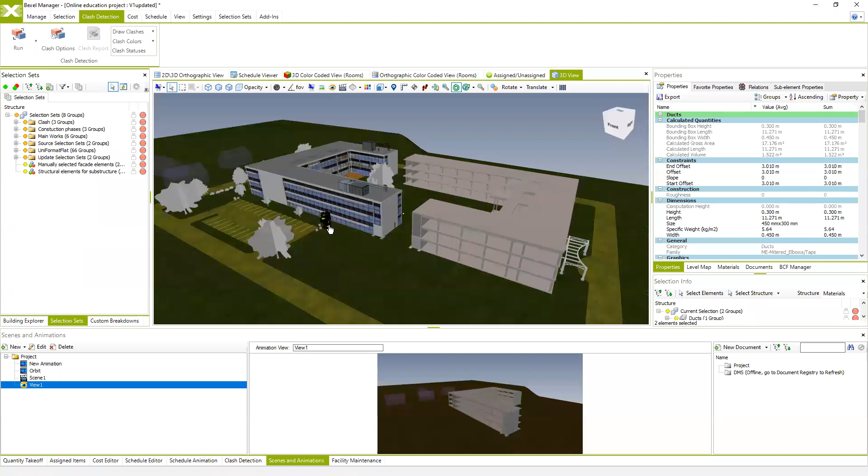We're going to continue with the same BIM model where we finished yesterday. It's the same BIM model demo sample which we updated with the new building, and we have all the selection sets we created yesterday automatically visible. We also have all other possible ways of segregating your BIM model, and these are all system-based, which we talked about in previous sessions. Today we're going to continue with the clash detection module, and then later on with quantity takeoffs.

If you want to analyze your BIM models regarding collisions between specific BIM model elements or specific disciplines, we can use the clash detection module, which is positioned in the lower part of the user interface. Also, if you want to use some brief clash detection analysis, such as checking if your BIM model has duplicates or similar things, you can use the clash detection tool in the upper part of the window, which has almost the same tools, but these are simplified.

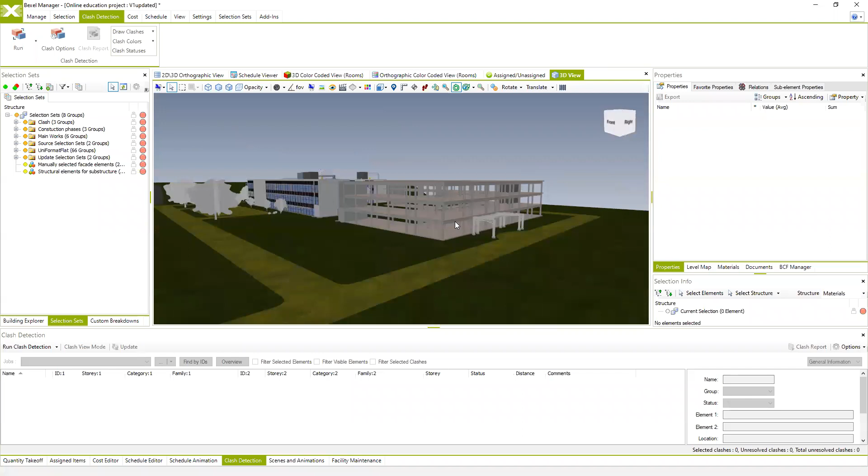If you want to just check if your BIM model, which we updated with this new structural building, has some duplicate elements, we can easily select these elements by selecting the structural elements from the BIM model using already created selection sets, or using spatial structure, whatever we choose, and then use the option to check duplicate elements.

This is something that frequently happens, that some design teams forget to delete or accidentally make some duplicate elements. If you want to check these kinds of issues, which are some kind of brief BIM checking for duplicate elements, you can use the option to run clash detection for selected elements only, or run for selected duplicates.

The difference is, if you're checking the selected elements for duplicates, only elements which have the same bounding box around them are actually analyzed, and this is the main analysis used to check if your BIM model has duplicates, or elements sharing the same bounding box around them.

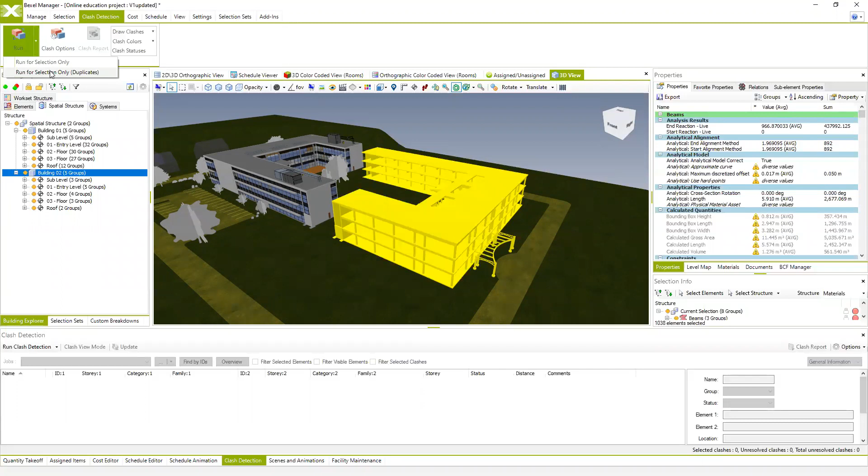Otherwise, if you use the option run for selection only, it means the system will analyze all your selected elements for any type of collision, not just duplicates, but even just touching elements between each other. So in case we just want to check duplicate elements, not touching elements which sometimes are not really a clash, we want to use the option run for duplicates.

In this case, the system will run a new window, which is the main window for clash detection analysis, and then we can just hit run. The system will tell us about the identified issues, in this case the duplicate elements, and then if we hit OK, the found issues, the found duplicate elements in this case, are listed in the lower list of found issues.

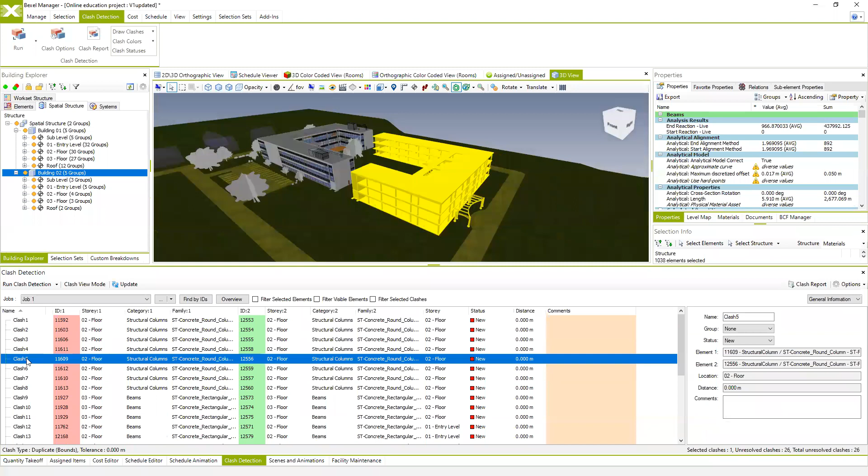Found duplicates, and easily, just by double clicking on any found issue, we can isolate these duplicate elements. So now I'm just going to double click on this found issue, and here you see that these columns are duplicate, and all these elements are duplicates.

Easily we can select all found issues, which have 26 in total, and by right clicking on the selected issues in the lower table, you can use the option to select all elements which are included in these issues. So we're going to select all duplicated elements just by selecting the left or the right part of these elements which are included in the collision.

If we select all elements, it means that we're going to select original elements and their duplicates. So if we just want to isolate duplicate elements without using original ones, we can use left or right selection. In this case, I'm going to select left, and these are all selected elements which are duplicates. We have 26 identified duplicate elements.

Then we can easily collaborate with our design teams in several ways. One way is to select the IDs of these elements using the option from the Selection tool, selecting the IDs of selected elements, and we can copy source or internal IDs. Source IDs are the same IDs which are used in the authoring tool.

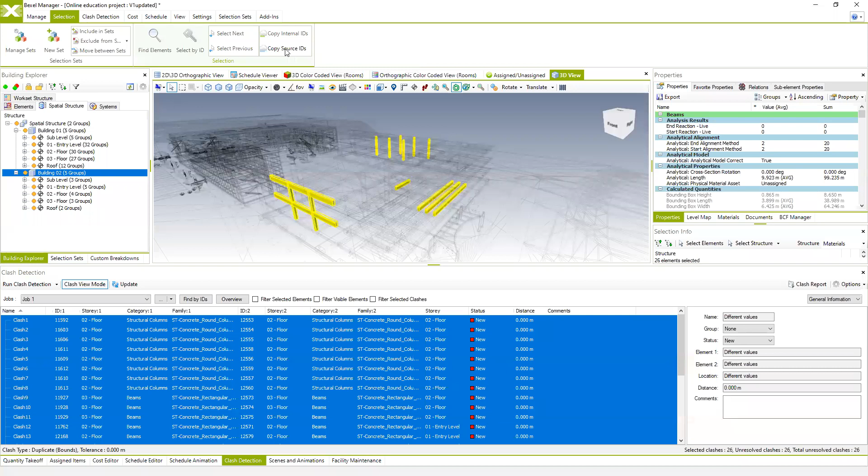If you are using BIM Collab and BIM Collab add-ins for coordination issues between different teams, you can also use the inbuilt add-in for collaboration, and that's the BCF Manager. BCF Manager is an add-in included in BEXEL Manager, and it can also be downloaded from the BIM Collab site. This BCF Manager can be installed in almost all other authoring and BIM analysis tools as well.

So you can, without any issues, share your problems with the participants in the project using the BCF Manager. If you want to use it, you can just open the BCF Manager window, which is positioned by default in the right part of the screen, in the same place where you can access the properties, the level map which will be talked about later, and also BCF Manager.

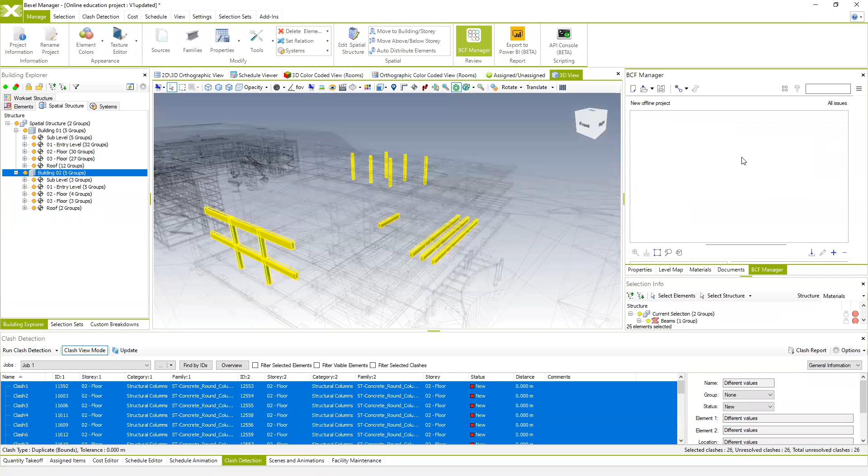So you can easily drag and drop the found issues in this window, or you can create new issues by selecting and making issues one by one. There are several ways how you can do it. One simple way is just to find the issue and create it.

You can provide your comments, specify the date, and when the milestone for resolving this issue is supposed to happen. You can also choose whether you want to create the issue with only the selected element or from all visible elements in your view. Now I'm going to save all visible elements and create my issue, and that's it.

We can do that for each issue separately, or by selecting all duplicated elements and just dragging and dropping all the issues right here in the BCF add-in, and the system automatically creates all these issues. By double clicking here, the system automatically creates the camera around the found issue.

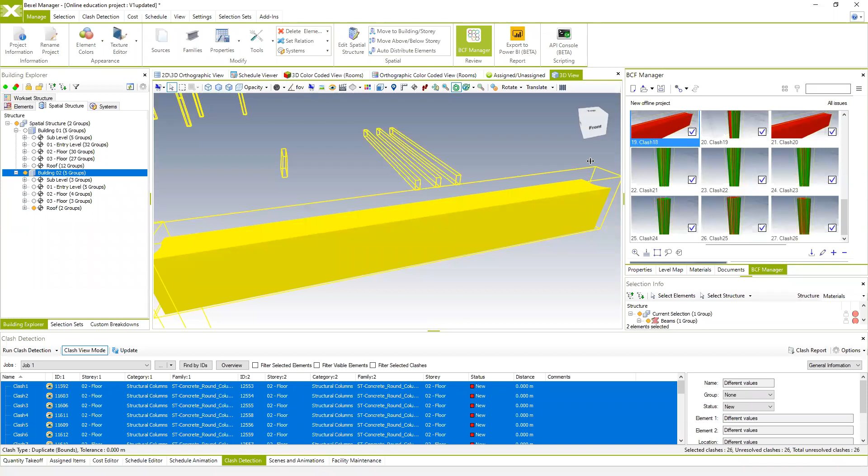Then we can use the options to connect to the BIM Collab project, which is online. If you're using BIM Collab, you can automatically collaborate on these issues online with the participants, or otherwise you can create a BCF file. By creating the BCF file, you can create your new issues.

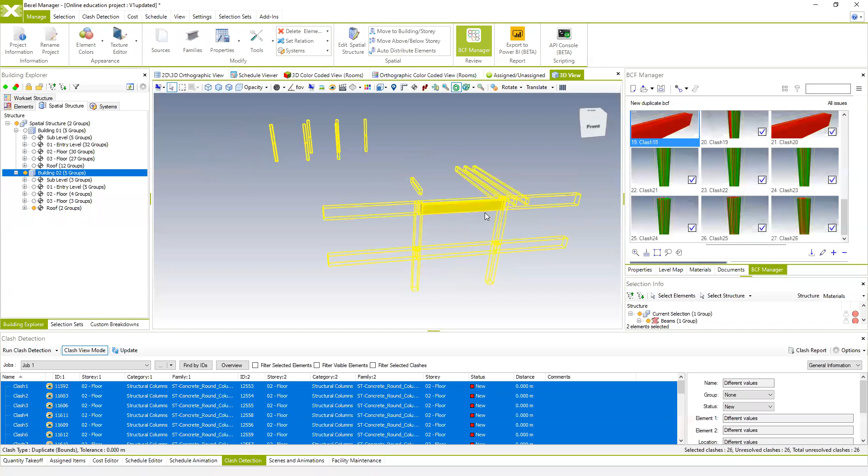And we can save this file, the new duplicate elements, and then provide these to the other participants on the project, and they can load these issues in the respective authoring tool. So this is how you can easily identify your duplicated elements, and then in different ways collaborate with other participants in order to delete these elements from the project.

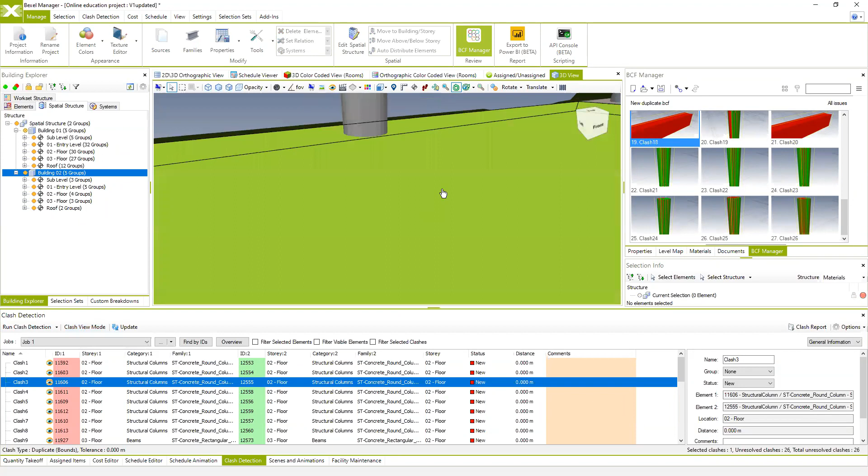This way of presenting the found issues or clashes is just another way of presenting within the 3D view. You see automatically when you start your BIM clash analysis and the listed issues, the clash view mode is enabled. If you want to disable it, you can just click on this small tool here and disable clash view mode, then use the normal 3D view with the ability to see all your BIM model elements regularly.

All the options used in the clash view mode can be accessed using the option for clashes in the right part of this window. Then you can specify how you want to present your clashes, the elements included in the clashes, and all other elements which are not visible as well. So here you can specify how you want to see all the elements and the clashes, and you can play with these settings. I'm not going to explain them in depth because these are all covered in the common YouTube tutorials.

Now I'm going to explain how you can do different types of clash detection, not just by doing this common and fast duplicate clash detection.

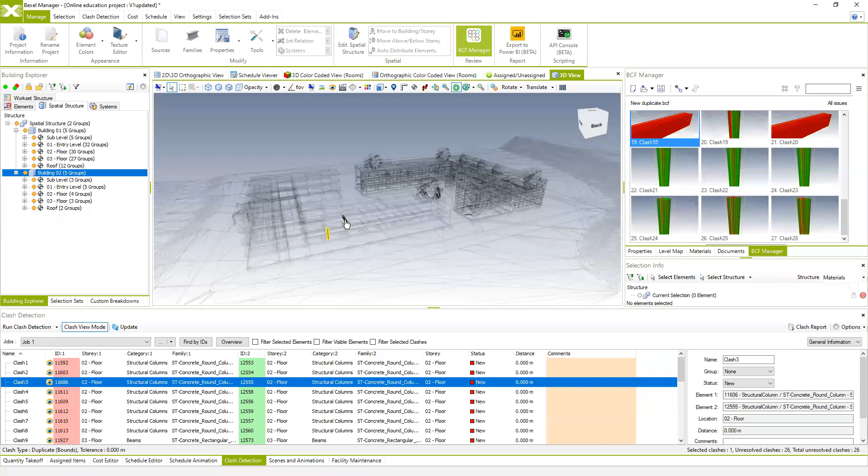Also, the other way how you can resolve these issues, but this is something that we do not recommend, because the main workflow is to wait and actually collaborate with the design teams and all the people who are responsible to create the BIM model. But in case the design is completed and you've got your BIM model and you have to make some kind of analysis, and design teams finish their job, you have to struggle with whatever you currently have.

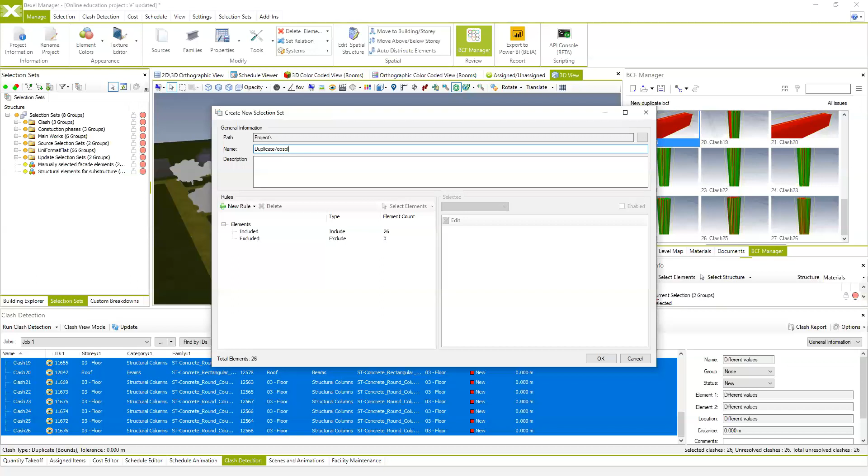Then you can handle these situations by selecting duplicated elements from your BIM model and then creating additional selection sets, for example. So you can always know which are the duplicated elements, and you will always know when to include or exclude these elements from any analysis that you want to perform later on. Or the other way, which we do not recommend, but it's also possible.

Within BEXEL Manager, you can just delete these elements from your BIM model. But if you update your BIM model and these elements are still present, then duplicates are going to be updated again. So you have the ability to delete any element from your BIM model using the delete option from your keyboard, and that's it. Now I will not delete these elements — I'm just explaining a way how you can handle these situations as well.

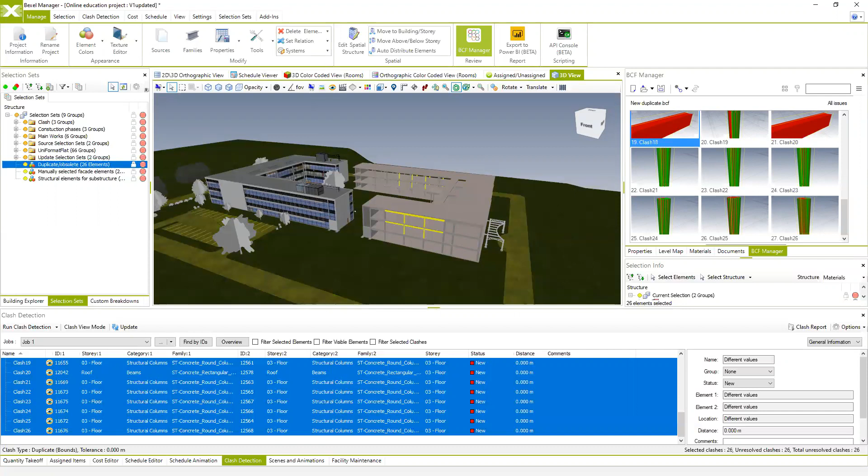But if you want to check your different disciplines for coordination and clashes, which is one of the very important processes in BIM analysis, then you want to create different clash detection jobs or analyses for different purposes, checking different disciplines and different types of elements. Usually when people talk about that, all these different types of clash detection analysis are binded with a clash detection matrix, which is usually defined by the client or other stakeholders, or it's actually stated in the BIM execution plans.

In this case, we can specify a new clash detection job used for analysis, for example, of clashes between structural elements and MEP elements. And we can do it quite easily just by running a new clash detection job from this window right here.

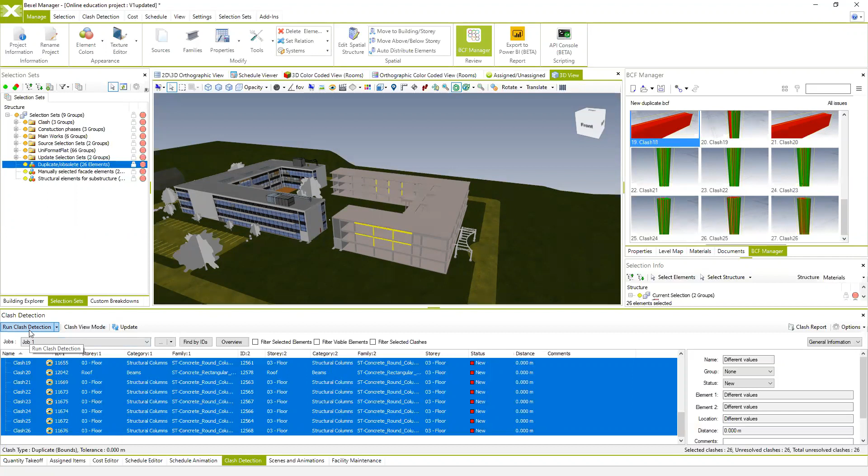Again, the system will bring up the same window which was used for duplicates. But in this case, I'm going to show you, in the lower part of the screen, the option which was automatically enabled last time — duplicate bounds. That was the clash type we used for the previous analysis. Now we can specify and use some of these other available types for clash detection.

One of these commonly used types is 'hard', which actually checks if your different types of elements or disciplines are penetrating each other at a different angle.

Otherwise, if you want to check your BIM model elements just for some kind of touching, and if your BIM model elements are going parallel between each other and just touching, you can use something more conservative for the clash detection analysis — that's the hard conservative type, which will identify not just clashes and interferences between elements positioned within some specific angle, but even elements which are parallel to each other and just touching faces between each other.

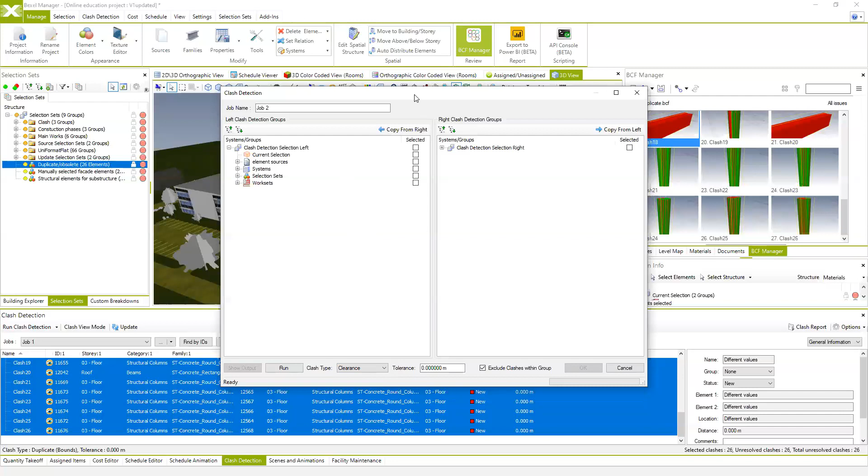And also the other way, or actually the common way, of how you create or specify which type of element will be checked for the clash with other types of elements is the place where you're specifying that, right here.

So right here, the system shows you all automatically segregated BIM model elements. Every time you open this screen, you'll see the work sets, the systems automatically segregated from your BIM model, and also the source BIM models used to create this federated model. Also, every time you create new selection sets, they'll be populated here and you can use them for clash detection analysis.

That's why yesterday I explained this is really important, and usually you're going to use selection sets for different types of further BIM analysis. This is where we're going to use selection sets for the clash detection analysis today.

As you may note, we have the structural, MEP, and architectural folders and sub-disciplines, or selection sets, which segregate the structural, mechanical, and architectural elements into different subtypes. We're going to use this for the clash detection.

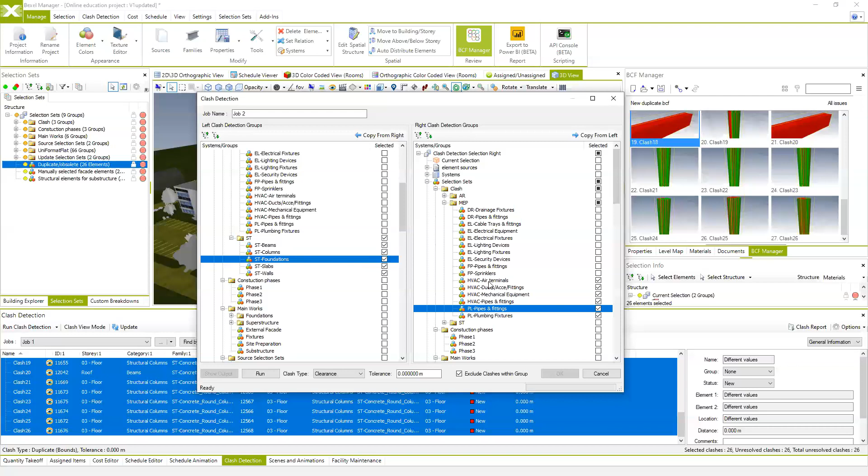This is the way we tell the system to check structural elements and all these sub-disciplines against all other elements on the right part of the screen.

We can specify the name for this specific clash job, and this one is Structural versus HVAC Systems.

Also, if you want to check only the elements on the left part of the screen against the elements on the right part of the screen, you can check the 'exclude clashes within the group' option. If this is checked, you'll only check the elements on the left versus the elements on the right.

Otherwise, if this is disabled, the system will also check if you have clashes between, for example, structural beams, columns, and foundations, and also check if you have clashes between HVAC ducts and HVAC pipes. So these are the differences.

In this case, we want to check the elements on the left versus the elements on the right part of the screen, and hit Run.

After completion, which is quite fast for a small project, you see the system shows that 718 clashes were found. If we hit OK, these clashes get listed here, along with the name of this clash detection job.

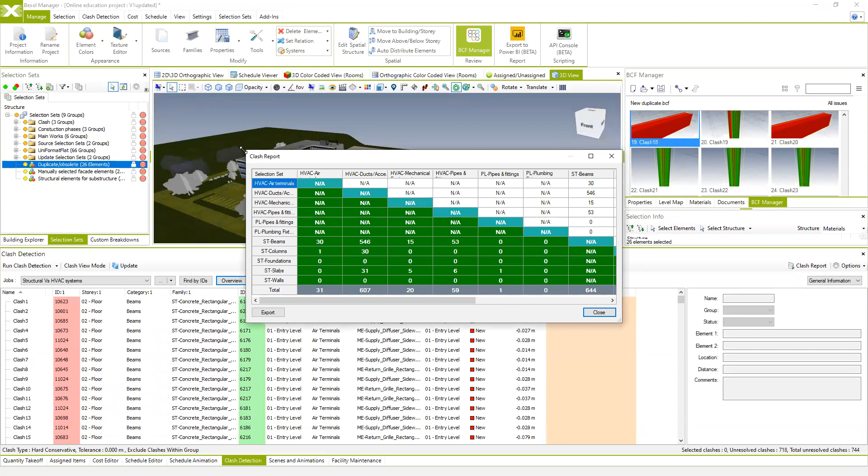We can see the overview of all these clashes by clicking the Overview option, and the system will show us something that looks like the clash detection matrix, showing all the sub-disciplines included versus other disciplines or subtypes, whatever we choose. The system shows the total clashes, and you can export this report as an XML spreadsheet into Excel.

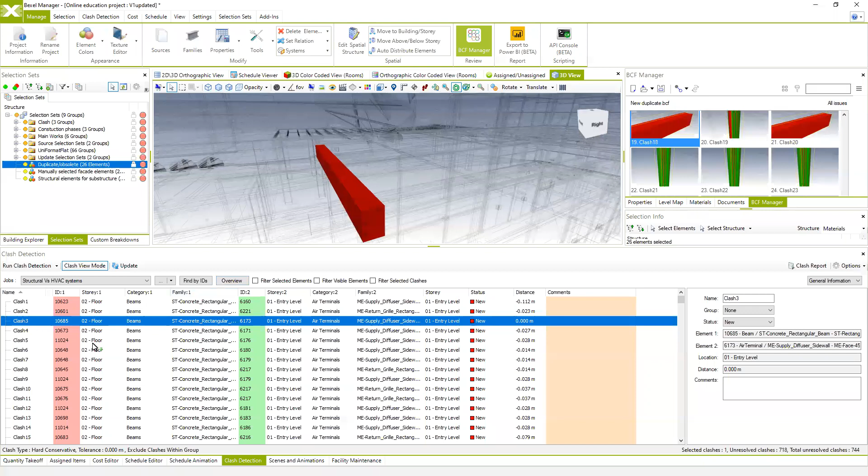All these found issues are accessible just by double clicking, and the system will show you the clashes included in the clash detection. We can turn on the visibility for all the elements, and the system will show us all the elements included in the clash.

You can go through the entire found issues, and if necessary, filter them additionally. One way is to use this option here and filter all these issues with the advanced filtering system. In this way, I can isolate to see, for example, only my structural beams and my HVAC mechanical equipment.

And hit OK. Even if I want to additionally filter these, we can use this filter on the right part of the screen and tell the system we just want to see structural beams and HVAC mechanical equipment, but only on, let's say, the second story of the building.

We can use this option right here, and now we see only these specific issues are listed. Additionally, you can select any of these available columns, right click on them, and then use additional filtering options.

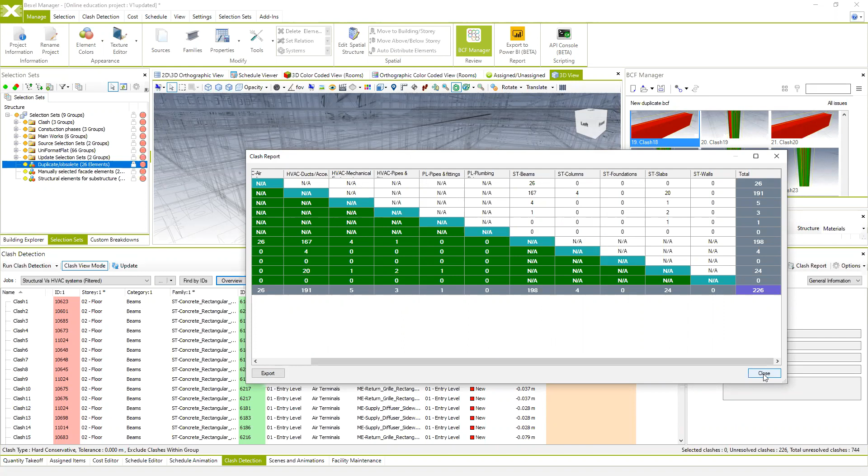So these are the ways you can filter found issues. Also, wherever you create a filter, if you click the overview, the system will show you a filtered overview, and you can export these kinds of reports as well. These columns present the identified clashes and the internal IDs for the clash, for the elements included in the left part of the screen when we run the clash job. So if you want to redo your clash job, you can just run the clash detection job and rerun it.

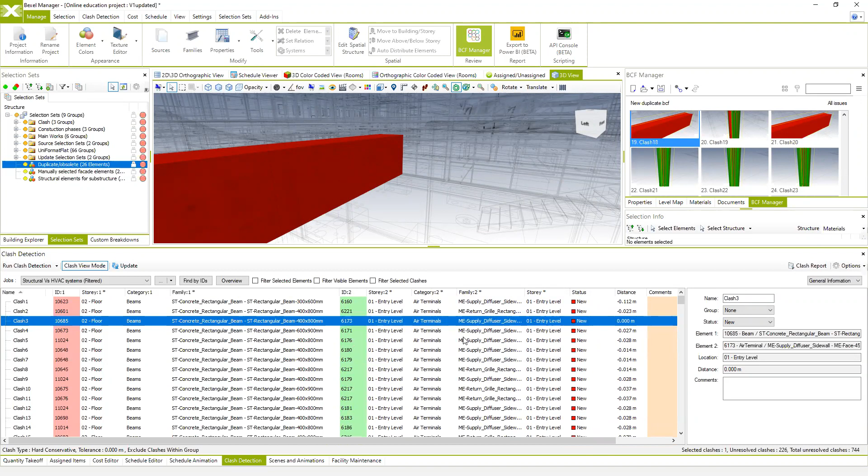All the elements on the left part of the window and their respective IDs are listed here. You see the story or building level where these elements are positioned, the category they come from, and for each one the exact element and type. The same applies to the right part of the screen, where you see the elements of the mechanical subdiscipline, their respective IDs, categories, families, and stories.

The next thing you see is the status, which is automatically generated, and this shows you that all these issues are new. You can create additional different statuses by right-clicking on this status and changing it to whatever you choose. So if you think this isn't really a clash, or it's some kind of severe clash, or whatever you decide it should be, you can change the status of this one.

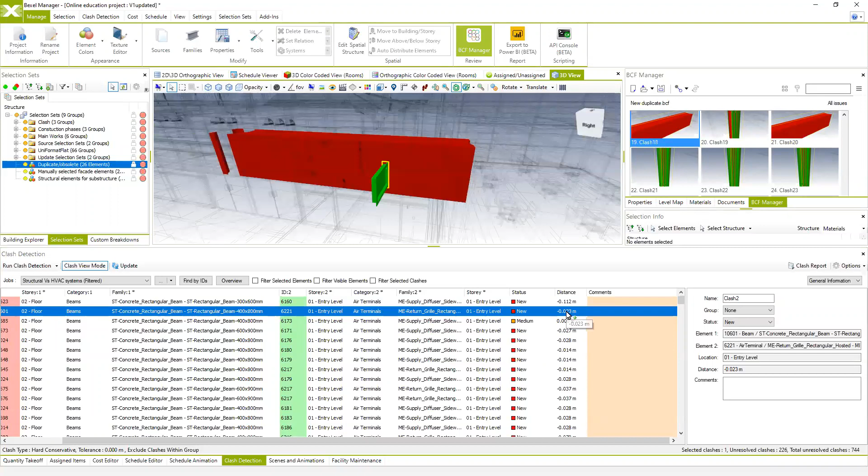The system also shows you how much one element actually penetrates the other. I specifically chose this one because the distance is 0, which means one element is completely within the other. If we change the opacity of this selected element to, say, 40 percent, you see that this mechanical diffuser is totally inside the beam. So if the distance is 0, it usually means the elements are totally within each other; otherwise the distance shown is the distance of penetration of one element into the next.

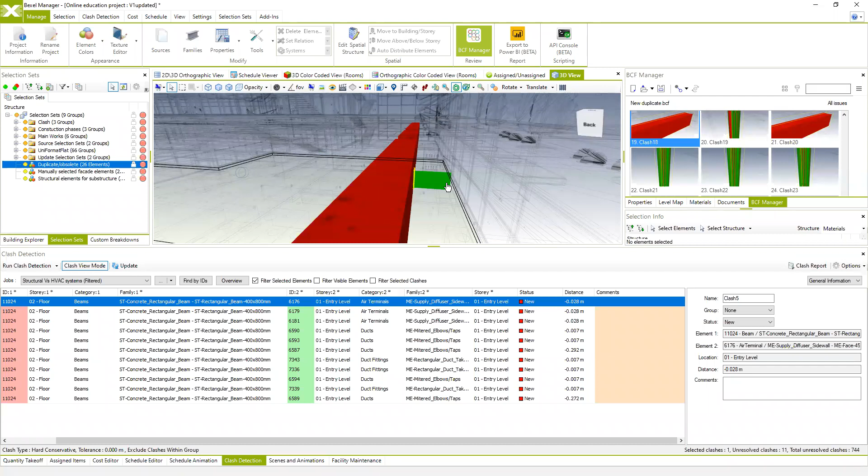Also, you can create groups of your created clashes, and sometimes it's really convenient to do so. If you think specific elements are having clashes with multiple different types of elements, for example one beam, you can select one element and then filter the clashes of that selected element using this option here. Now we see all the clashes caused by only one selected element, and these are all of them.

So we can easily select all these clashes and create a group of all the clashes caused by one element, and you can create these kinds of groups. When you specify the clash status for the group, all elements within the group will automatically change status as well. Now I'm just going to disable all the filters, and you see the group of clashes along with all other clashes also available.

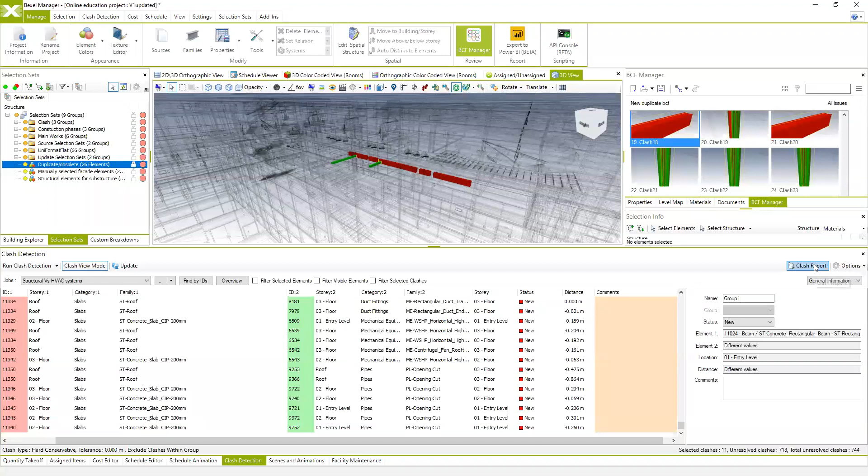We can also create clash detection reports using the clash report option, where all these found clashes can be specified for how we want to create the report. Also, before that, let me show you the level map, which is really important when going through the clashes. When you go through your clashes, the level map will show you exactly where the specified clash is located in the plan view of your BIM model.

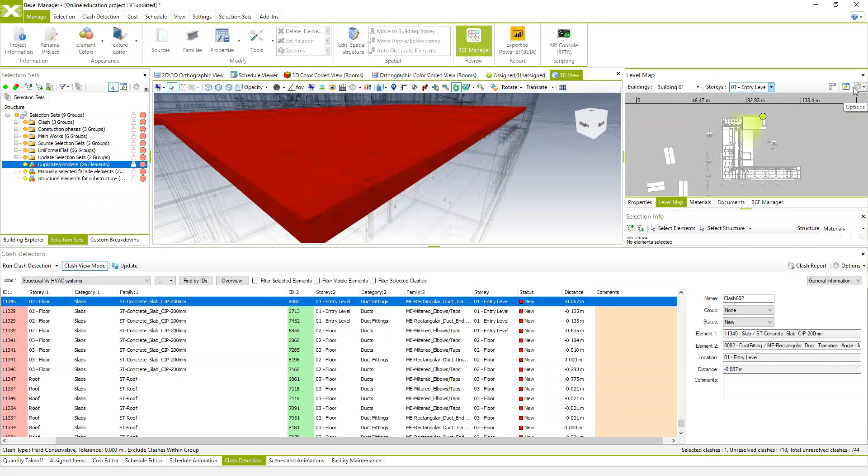You can include this kind of small representation of your BIM model in your clash detection report. All these options for the level map and the visibility of its elements can be found within the level map options, where you can see additional settings for how it will be presented. Then, if you want to create a clash detection report, you can specify what will be included and visible within it.

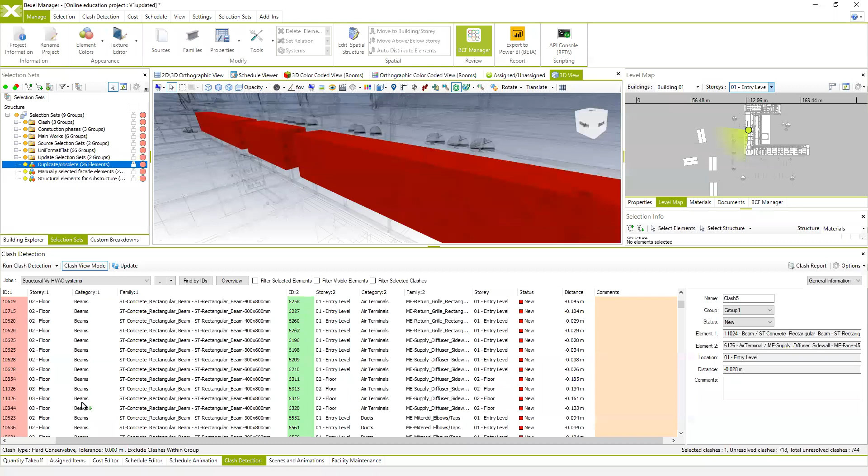For now, for this demonstration, I'm going to create the clash detection report by default. Prior to that, we can choose whether to include all clashes in our report or just specific selected elements. Depending on the number of elements included, the export process can take some time, so we can specify multiple issues and create the report, or export the entire clash detection. I'm going to select just a few clashes, and let me do that.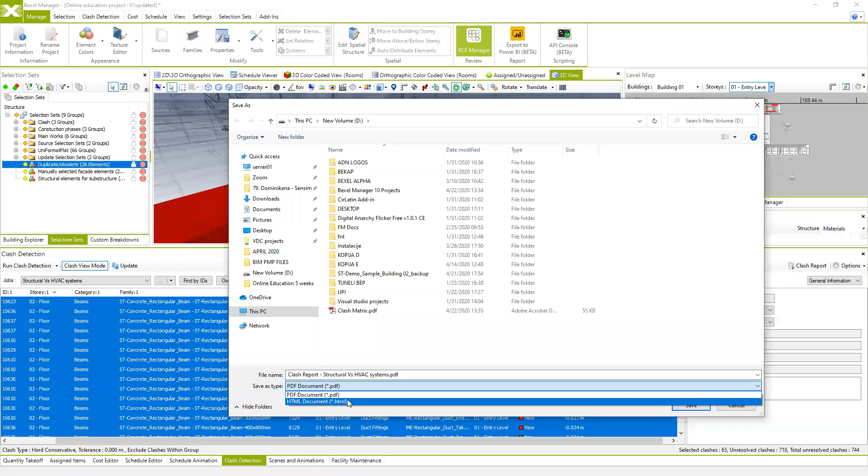So we're going to select all these clashes and export the clash report. By default, the system will ask if we want to export a PDF file or an HTML file. This time, I'm going to export a PDF file, and the system will export these clashes found, and this is how the exported report looks like.

Also, prior to the export, this is the exported clash detection report with selected clashes, which was 65 in total.

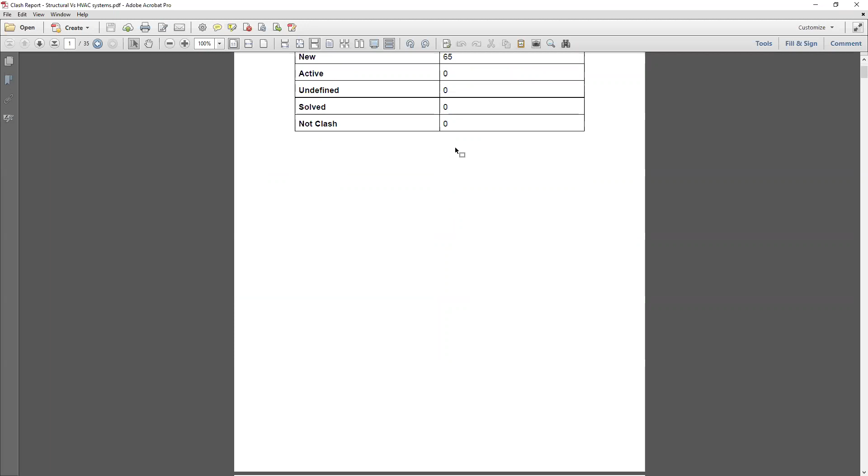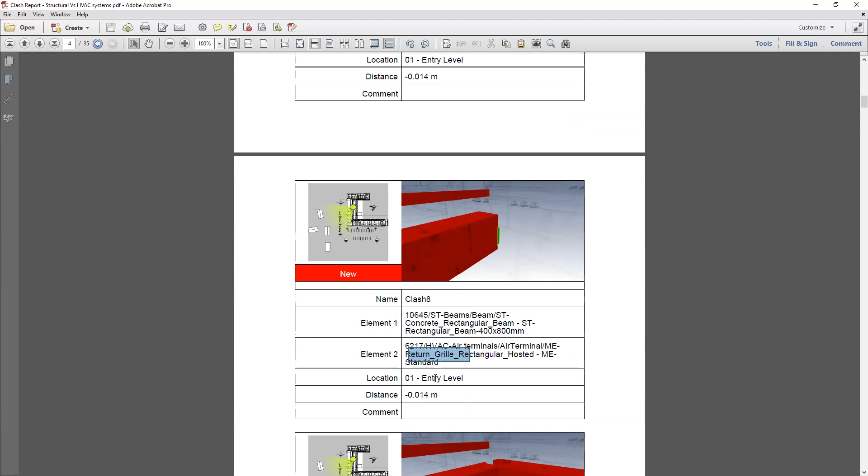You have a small review of your clashes, and for each detected clash you see a view or image of the presented clash, and a small view showing where exactly this detected issue is positioned in your building. Then for each detected issue, you see the name, the element explanation or description of the element included in the clash, the other element included in the clash, and the location for each of these.

Additionally, you can use the comments as well. This is how the clash detection report looks like. These IDs are internal IDs, but prior to export you can choose if you want to export the source ID instead.

And this is the way the clash detection job works. Also, as I've already shown you, you can automatically drag and drop all these found issues into our BCF Manager, and the system will automatically create multiple issues which you can additionally collaborate on with other participants on the project.

I'm going to briefly present how this workflow actually looks like. As I explained previously, you can use the online version, but in this case I'm going to use just a BCF file, which you can send to your participants on the project.

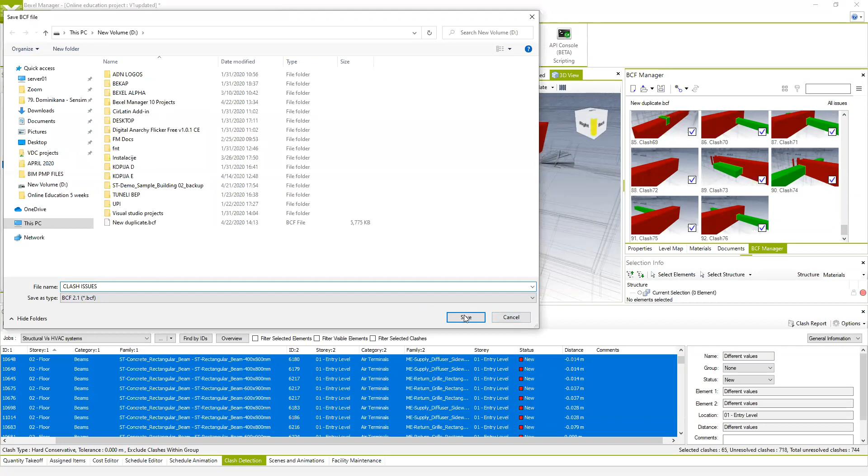Then, if your authoring and design teams are using Revit, for example, for design, I can open my Revit file, which has a structural BIM model linked with the MEP model.

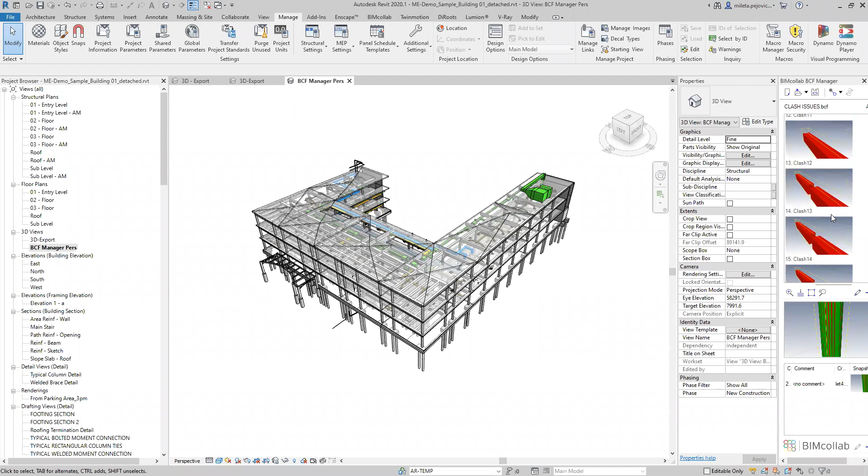I also have the BCF Manager from BIMcollab already installed, and I can open the saved BCF file provided by other stakeholders on the project. Automatically all these issues are listed here, and we can go through them by just double clicking, and the system will automatically create the view showing the exact same issue.

So you see this is the issue, and you can easily now resolve it in the authoring tool. You can do that for all the found issues the system automatically creates, and this is really useful for collaboration. So this is the way you can collaborate with other participants.

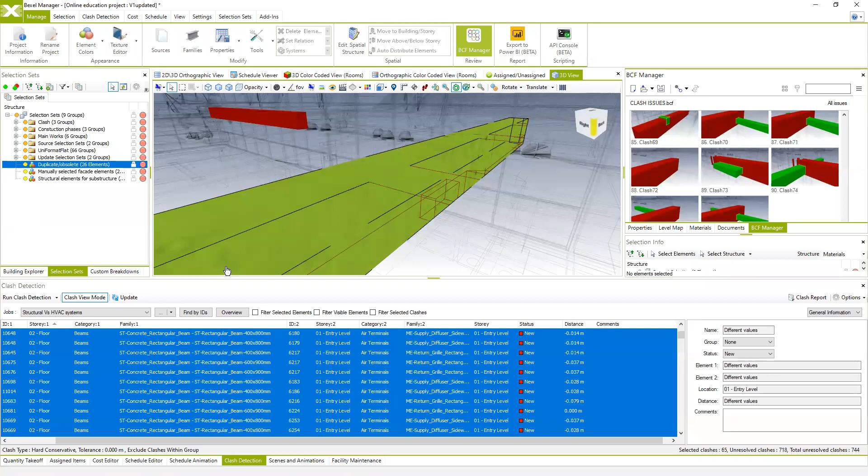Now I'm going to briefly show you the other option for creating a clash check: choosing clearances, and the difference from what we already explained. So if you want to check, for example, your electrical equipment and plumbing elements, we can run a new clash detection job.

We're going to call it electrical versus plumbing. In this case, we can again select from all the available segregation of your BIM model, choosing whatever we want. Here I'm going to choose mechanical selection sets, or the elements from selection sets, and choose all electrical elements.

By hitting space on my keyboard, all these are automatically checked. On the right part of the screen, I'm going to deselect all and use only, for example, plumbing elements.

In this case, we want to check the clearance, or make sure that the minimum distance between the elements on the left part of the window and the elements on the right part of the window is at least, let's say, 40 centimeters. So I'm going to put 0.4 meters in the clearance field and hit run.

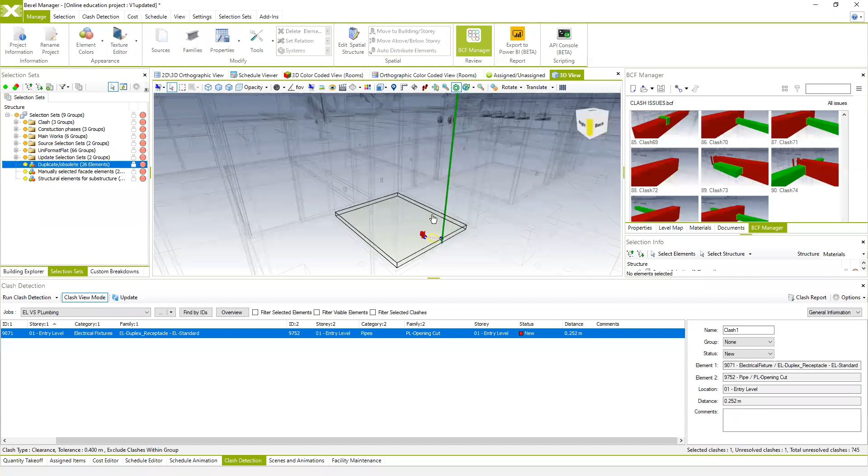So the system actually found only one clash, or one element, with a distance less than the one specified here. So we can easily find it, and that's it. The system also shows the distance between these two elements. You can repeat this for all other types or disciplines of your BIM model elements. It's a really easy and fast way of identifying issues and collaborating on them with other participants on the project. I think this is clear.

Let me just briefly check if you have some questions for the clashes before we continue with the quantity takeoffs.

Can you create various selection sets in the same way as custom breakdown? Currently, you can create selection sets in the way I presented yesterday, but in the next releases of BEXEL Manager, we plan to include a new feature which will enable you to create selection sets in a more flexible and faster way, similar to how you create custom breakdowns.

Workflow to fix the clashes in the native file includes BCF use, and there were some problems in the previous Solibri. I want to be sure that everything is working well.

If you're talking about issues related to the BCF, then I think the best way is to communicate with BIMcollab, because they are actually responsible for that add-in. We are including that add-in, but basically this is something they approve as well.

Could you please show a sample of exporting the issues as a BCF, including 5 clashes, including revisioning, and sending it back as a BCF to BEXEL Manager?

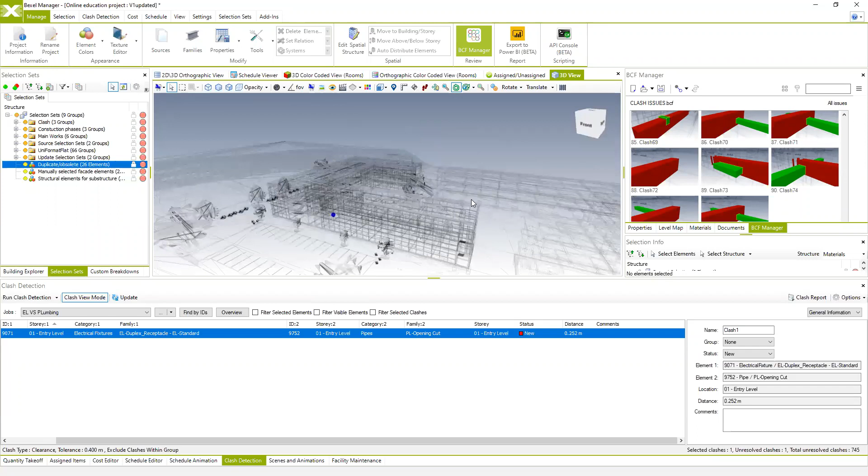So no more questions regarding clash detection. I think it's clear, so then we can continue with the quantity takeoff.

So the next step, which is coming up in the BIM analysis processes, is that you want to calculate your quantities based on the available BIM model, and then according to the available quantities, you can further quantify the expenses and also create cost estimates and similar things.

So if you want to create quantity takeoffs from the BIM model, we also have a tool for that. The module for quantity takeoff is positioned in the lower part of the screen. So if you hit quantity takeoff, a new window appears again, and I'm showing you purposely this sample model without anything created automatically.

So I'm going to show you how you can create your quantity takeoffs from scratch. Usually, for quantity takeoffs, you use selection sets most frequently, or you can create quantity takeoffs from available categories or file types, family types of your BIM model.

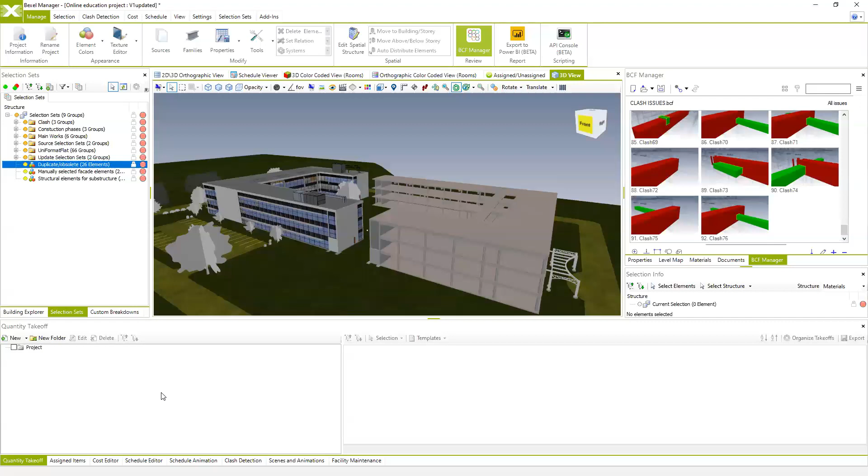So how it works: if you want to create a quantity takeoff for selected elements - and this isn't so commonly used, but usually if you want to make some kind of brief analysis of quantities of selected elements - we can select multiple elements from the BIM model just by selecting them one by one, or using already available system-based segregation, and then select, for example, all structural columns and beams from the BIM model on both buildings. I can isolate these quite simply, and then calculate the quantities of selected elements.

If you want to do that from selected elements, you can use the option 'create new quantity takeoff from selected elements.' The system automatically includes the 1,347 selected elements in our quantity takeoff - we're going to call this one 'beams and columns' - and then we can specify or tell the system how to segregate these elements for our quantification.

So similarly to what we did for the custom breakdowns, we can just right click on edit elements and use a specific rule for segregation. In this case, I can use all these available rules, which are system-based: building levels, categories, family, source, system name, and material. Or we can use discrete properties and continuous properties in the same way as we did for segregation within the custom breakdowns.

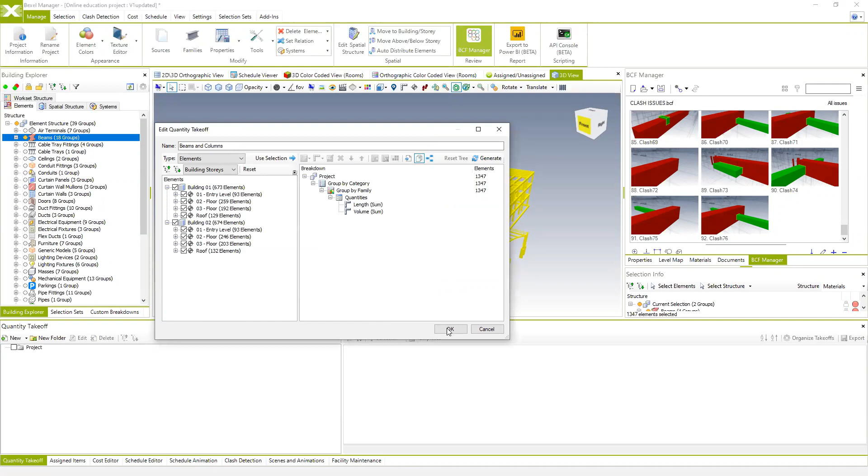If you hit OK, it's quite fast. The system automatically creates quantity takeoffs of selected elements, segregates them according to the categories, and then according to the family types. And you see the colors according to the family types.

If I hit right click on my created quantity takeoff, we can edit it. And then usually before you start editing, we recommend to reset your tree and then start new, or edit the current quantity takeoff or type of segregation.

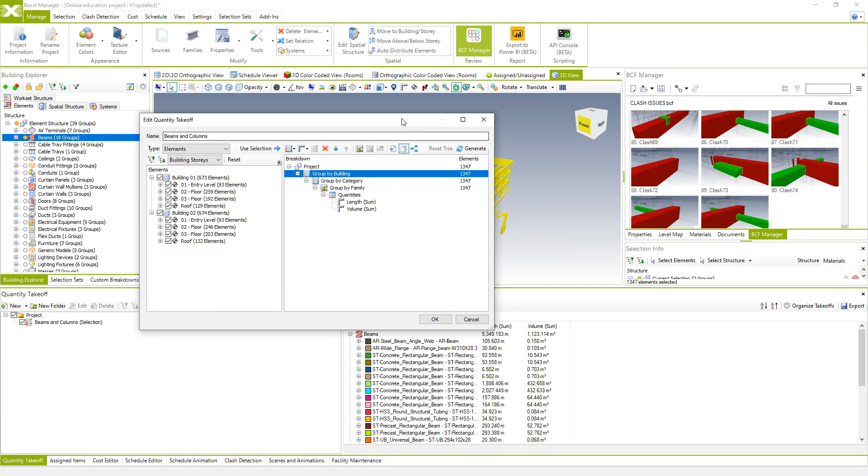In this case, I can add an additional rule for segregation regarding the buildings, and we can choose to make this the first level of our hierarchy, so I can move it or shift it to the top. When I hit OK, the elements will be segregated according to the buildings and then by categories and the families, as you may see.

It's really, really fast, and you see the quantities automatically, but that's not all. Similarly, as you use the custom breakdowns to colorize these elements, we can use the same color-coded view to colorize all the elements according to the quantity takeoff.

So instead of using, in the viewer mode, custom breakdown color coding rules, we can choose quantity takeoff, and now the elements are colorized according to this.

All these quantity takeoffs are automatically related to the elements from the BIM model, and we can use the option to select elements in the BIM model from this list, or we can choose auto select.

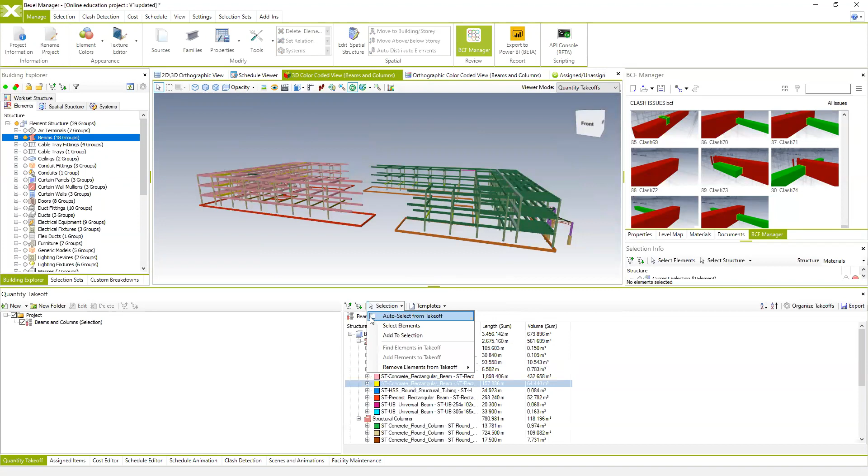Every time when I select anything in the list of calculated quantities, the system automatically selects the elements in my BIM model. It also works the other way around: if I select the beam, we can find the element in Takeoff.

You can see that the internal ID for the selected beam is 10933, so we can find it right here, 10933. That's the one, you see it's selected. If I select something else, it's going to be highlighted.

So this is the way how you can create your quantity takeoffs from selected elements. But the best way to create your quantity takeoffs is creating new quantity takeoffs from blanks.

Then you can use whatever you want to create or include your BIM model elements in the quantity takeoffs using available segregations, automatically available segregations from the buildings, stories, categories, families, selection sets.

So you can choose, or in this case, I can use everything from my project to be automatically calculated, and then I can segregate it according to a specific rule.

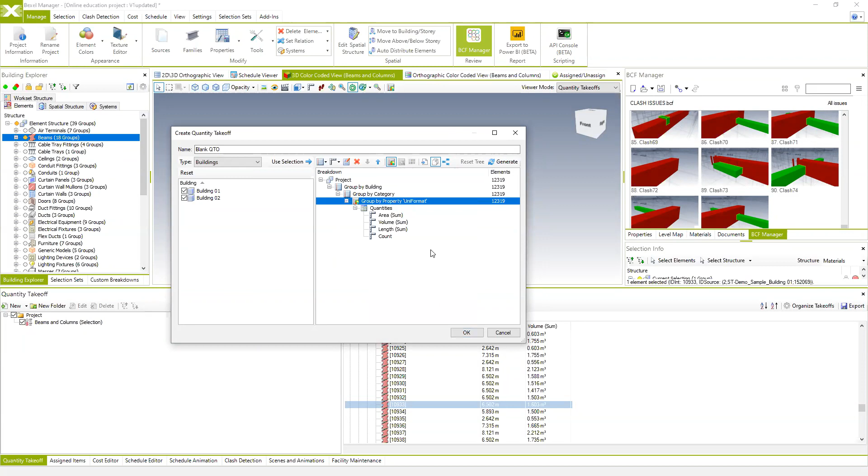So it's quantification for the entire building or entire project, based on Uniformat code.

If we hit OK, the system automatically creates a new custom quantity takeoff for all the elements. All elements are automatically segregated by buildings and categories, and then each category is additionally segregated according to Uniformat code.

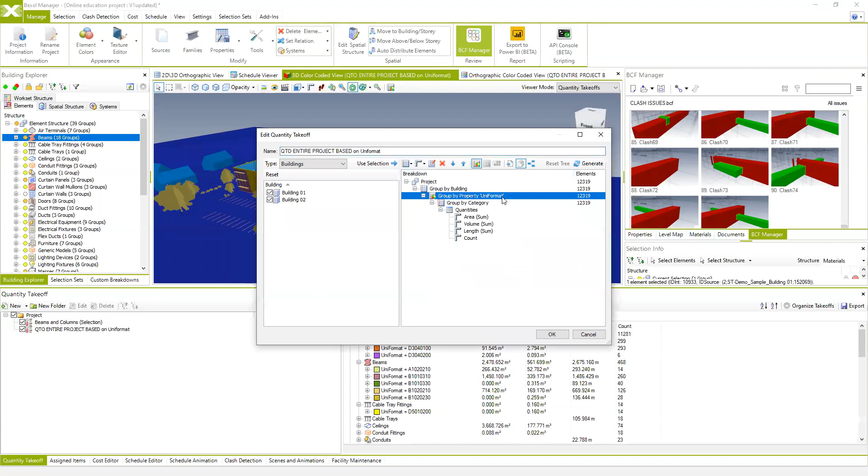We can edit this quite easily and, for example, make the Uniformat the hierarchy above, and then we can hit OK. The system refreshes almost instantly.

So you see this is another way of segregation and quantification of your BIM model elements. And then you can select and isolate these elements from your BIM model, and also, what is the best, let's say,

one of the best features is that you can export all these calculated quantities into Excel spreadsheets.

Also, one of the tips is, if you included just specific BIM model elements, as we did in a previous quantity takeoff, all your created quantity takeoffs are listed right here, and you can scroll through all these available quantities.

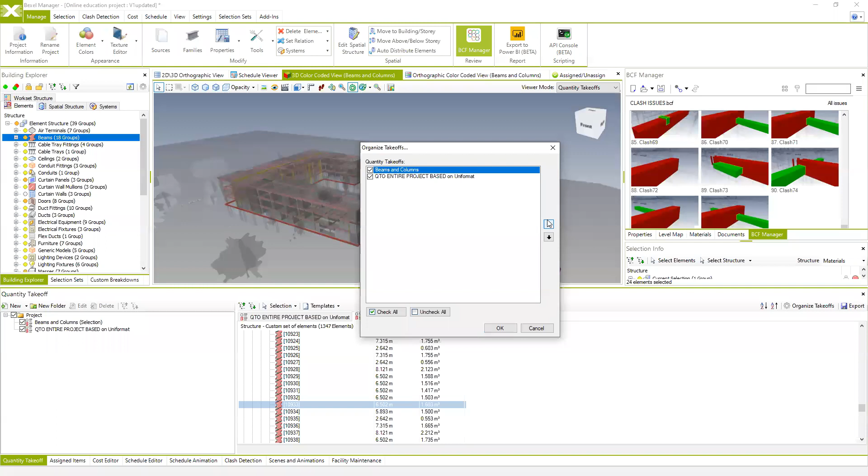You can hide them, you can change the way how they're going to be presented here. Hit OK.

Also, for all these different types of generated quantities, you can use the option to isolate the elements which are only included in that specific quantity takeoff.

So in the previous one, when we calculated quantities of beams and columns, we can choose to see only beams and columns, or the entire project, but only colorized elements are included in the quantity takeoff. All other grayish elements are not included. In our entire project, everything is included, so everything has its color, and we can easily export these kinds of quantity takeoffs using the export tool.

Then you can choose different options. I'm going to present you the default export and then the difference between that and the styled report. So default export looks like this. Depending on the quantity and number of elements, this export takes some time, but in this case it's quite fast.

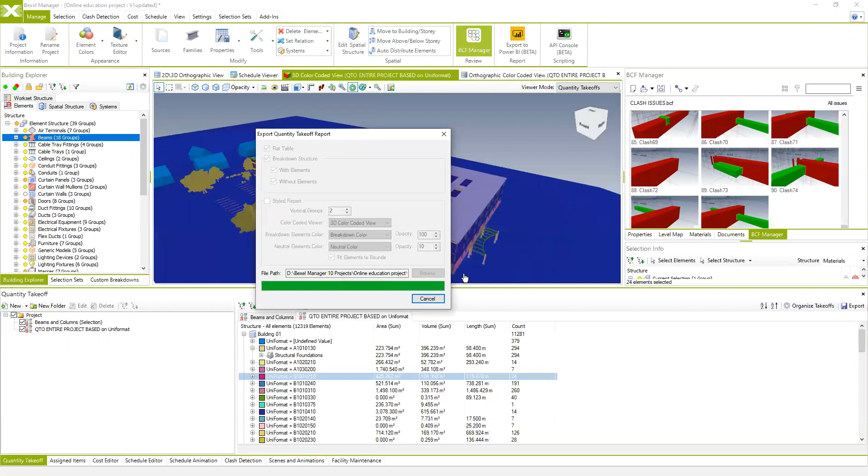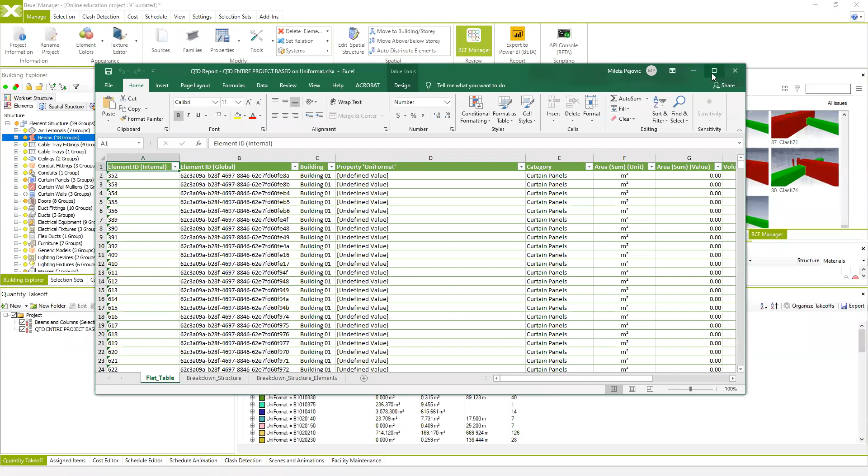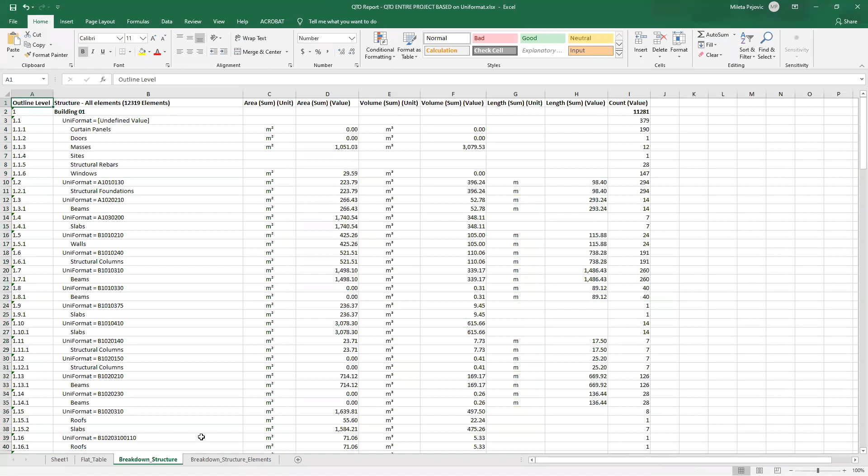In the way you like, or you can use the automatically generated breakdown structure with the elements. This breakdown structure is identical to the structure you see here. You see the uniformat, the types of the elements, and the quantities which are included in the quantity takeoff.

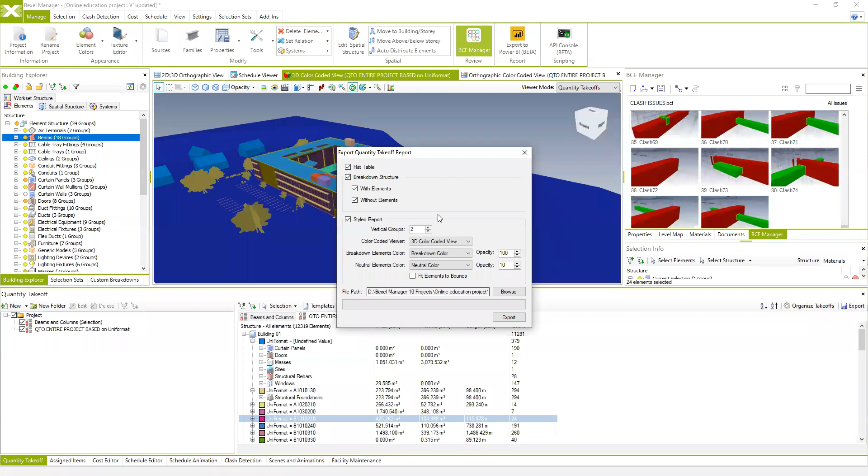An additional way to export your quantities is by selecting the styled report, where we can have the system include a visual representation of the included quantities. In this case I'm going to unselect 'fit elements to bounds,' so the screenshots will be created using this camera position for the images the system will automatically generate. Depending on the number of quantity items, the system will take some time.

So we can replace the already created quantity takeoff. I'm going to close it. The system exports it, and this is how the exported quantity takeoff report with a visual representation looks like.

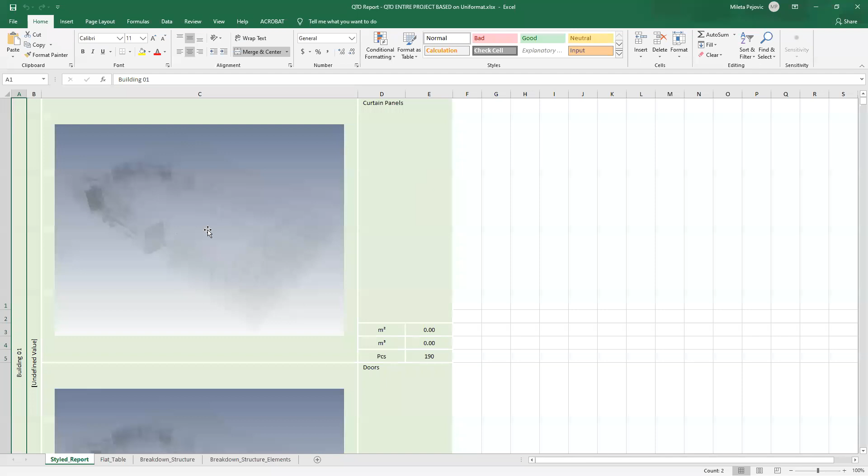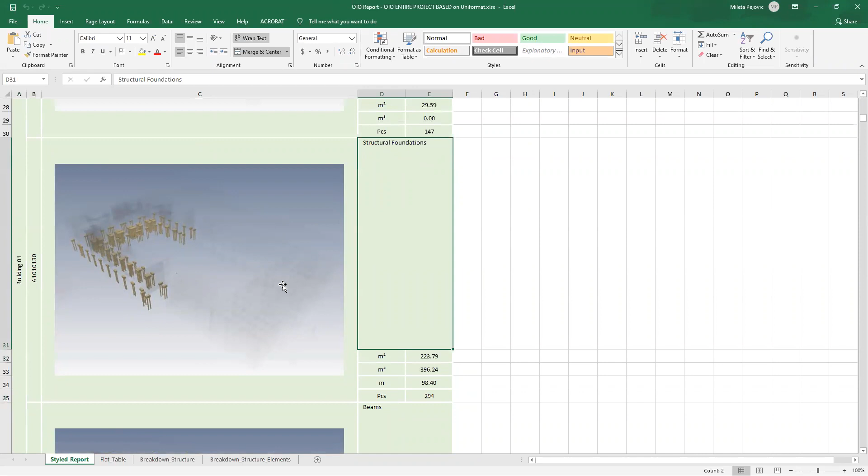You see the first sheet is the new styled report, and here you may see all these small quantity items regarding each specific element, like this one for the beams. You can also see the building segregation, the uniformat, and the type of elements and quantities. You can do that for the entire building or for each item, depending on the number of items and the size of your building.

This is really useful to explain to every participant on the project exactly which element is included in your quantification, so you avoid any confusion about whether a part of the element, or a phase of the building, is included in the quantities.

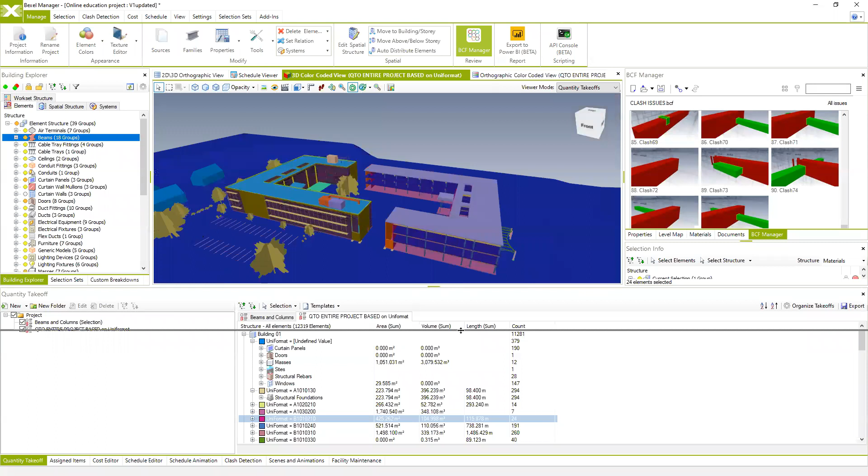I'm also going to briefly show you an additional way of segregation on a different type of project and how it works. This previous one was a really small project, with around 12,000 to 20,000 elements within the project information. Now I'm going to open a bigger project.

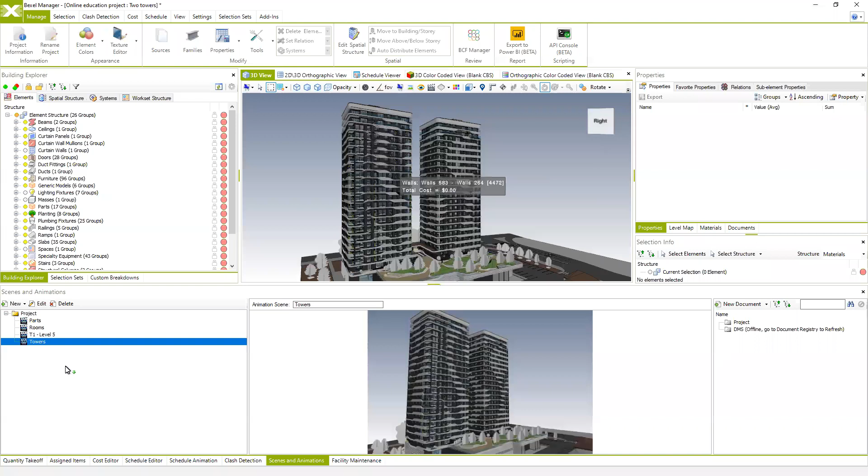Here I'm going to show you how to create quantity takeoffs for the rooms using different available properties. In this case I'm going to use already created scenes, and now you see all the rooms in our building, each with specific properties. If we want to include information like room types, number of rooms, description, and names of specific elements—rooms in this case, but you can choose any property from your BIM project—we can create a quantity takeoff.

Let me go to the quantity takeoff and create a new one from blank. In this case we can choose to include only our rooms or spaces in the quantification. Here we can organize our quantity takeoff of the rooms based on, for example, department, using a discrete property. Using discrete property, we can segregate elements according to their properties, so I'm going to choose department from the list, and then additionally segregate by another property, such as the name of the room. Then we can quantify the area of the rooms using add quantity.

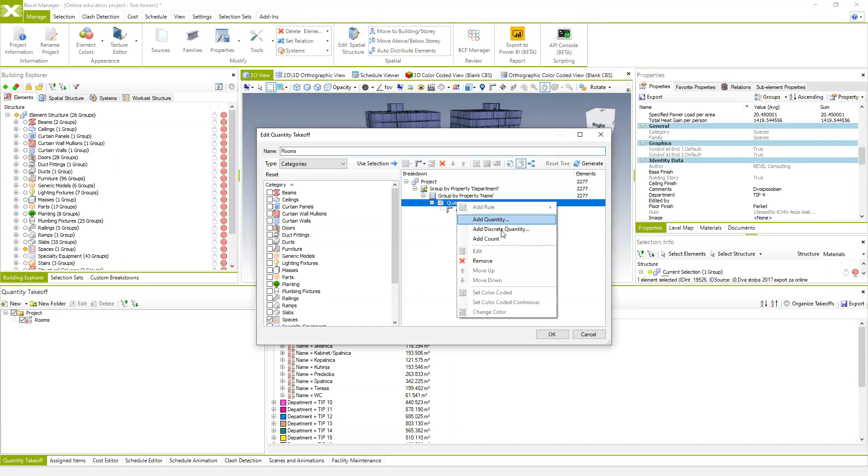What I wanted to show you is how you can additionally segregate these using discrete quantity instead of quantifying summary. If you want to calculate summaries of volume, area, and so on, use the quantities. But if you want to present other properties and values within additional columns, choose include discrete quantity. This way I can present the number of rooms, floor finishes, or any other available property as a specific column.

I'm going to use the comment. You see the comment included in the quantities, so the comment will not be summarized, but the information will be visible. I'm also going to use floor finish, since we have that information added in the properties of the room, and another property, the number of the room.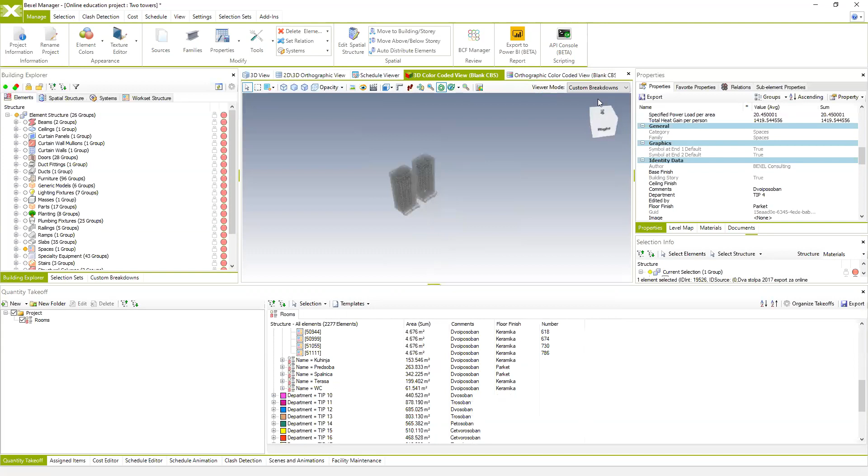If I hit OK, the system shows additional columns with the number of elements, floor finish within each room, and the number of each room. Then we can see the colorized elements according to this. It's really useful, and you can easily create a styled report with this kind of information, though depending on the number of elements and size of the project, it also takes some time.

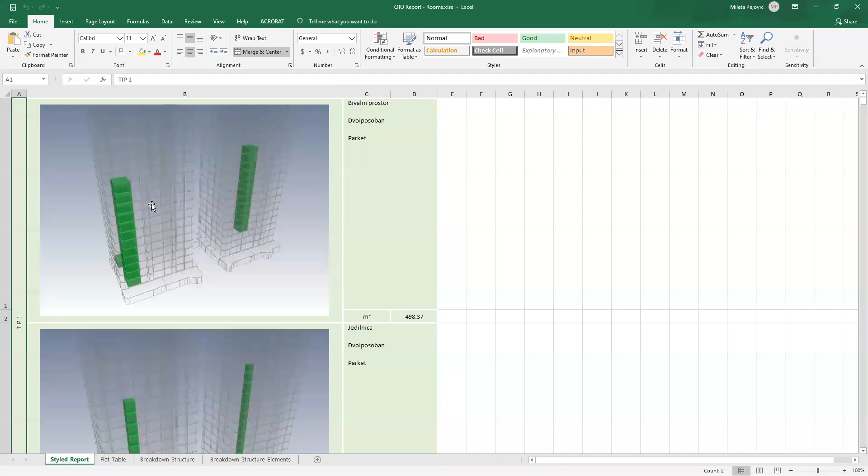This is how the created report looks like. You see different rooms with different types, the area, and where specific types of rooms are positioned in your building. Then you can see the breakdown structures, similar to what we see in BEXEL Manager.

I'm going to show you briefly another quite large project and how fast you can work. This project has more than, let me check, 400,000 elements within itself, and this is how fast all these quantity takeoffs work. It works quite fast for entire big projects, depending on the number of elements and types of segregation.

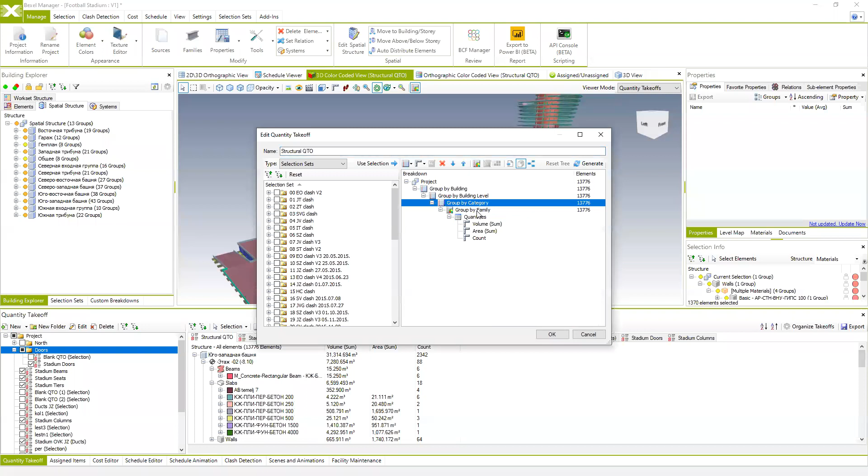If I choose to segregate this differently, let's say just colorize this according to the category, hit OK. That's it, quite fast. You can save multiple quantity takeoffs for the project, then load them and analyze the project according to that.

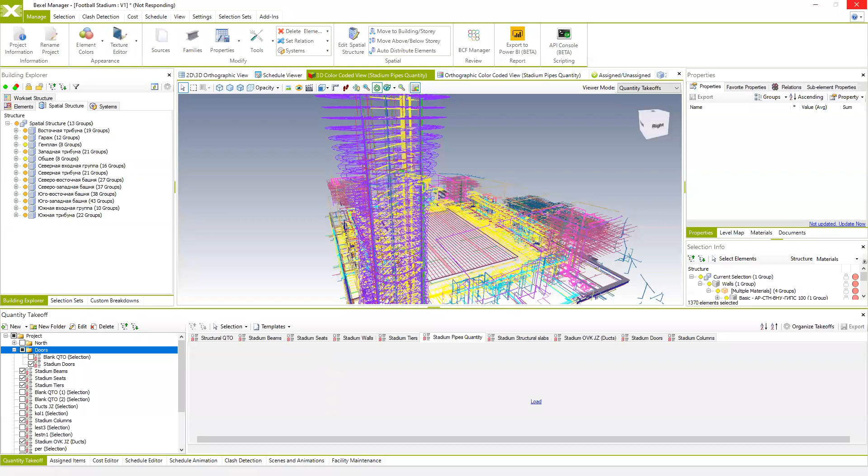These are the pipes, and you can see the size of the pipes from the loaded quantity takeoff. Before we conclude today's session, I'm going to briefly show you this created quantity takeoff and the project when it's saved, and how the system automatically updates all the information when the project is updated.

I've saved it. I'm going to close the project, and then update it with additional, or updated, mechanical and structural elements. I'm going to choose the project from the versions. This was the previous one, and we're going to update it.

With, let's say, structural and mechanical source. So when this is completed... let me just, in the meantime, try to respond to your questions.

The system asks us to match the source. So this one is structural, or this one is the new one, mechanical building, and this one is the structural one. And this one is for building 2. Hit OK. In the meantime, I'm going to read your questions.

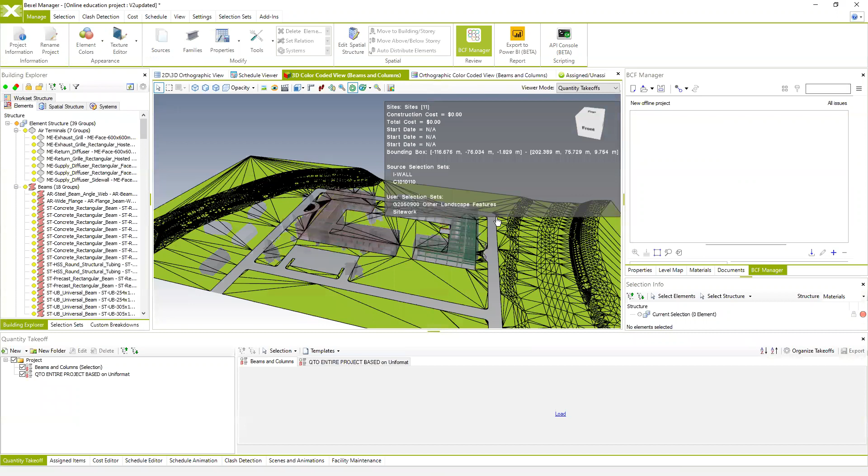I'm going to open the updated project. What is the important advantage of the quantity takeoff? I think you see it already. The advantage of creating quantity takeoffs is the flexibility and how fast and accurately you can generate different kinds of quantity takeoffs, almost instantly, in a minute.

Once you've created your quantity takeoffs, you can update the project as I did now, and you can see the updated quantities automatically, everything updated automatically. Now we have, even for building 2 which has MEP elements, these MEP elements included in our quantity takeoff.

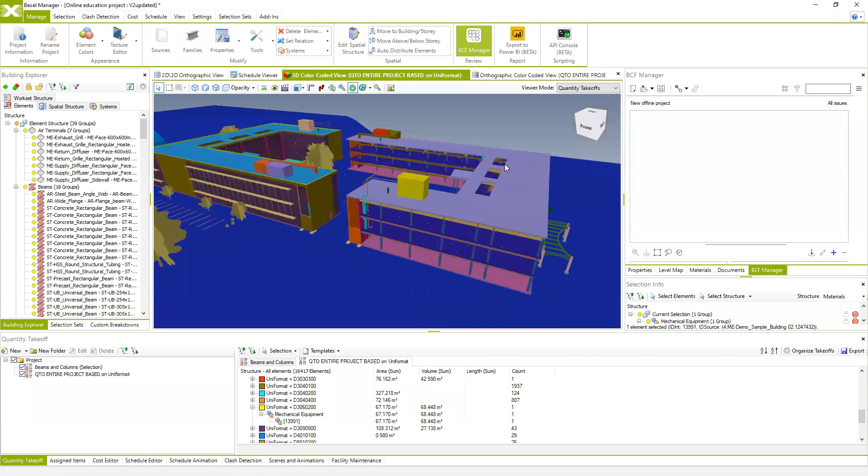You can see this one is automatically included right here. So everything is automatically included because all these newly added elements are already included in the selection sets or in other types of segregation which is used for quantity takeoffs.

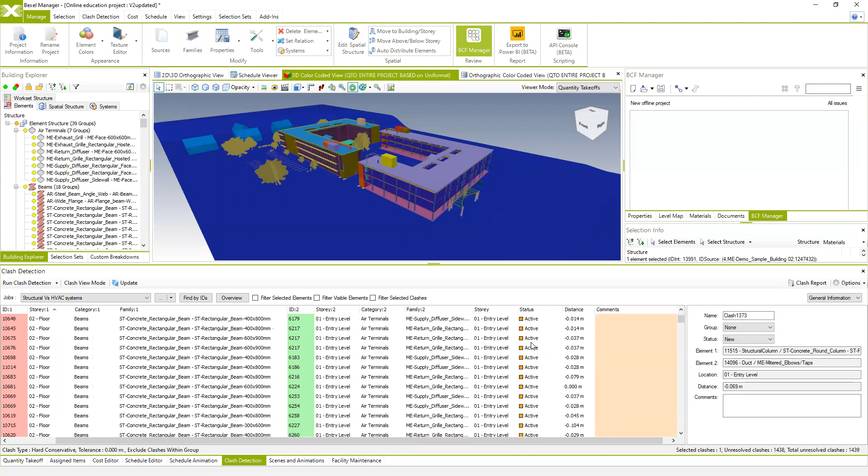Also, if we go to the clash detection, we updated the building. So if we go to, let's say, structural and HVAC, we can do the update, and then the system will automatically check if we have new clashes. Now you see previously identified clashes are marked as active, and the newly created ones automatically have the status new. These are mainly for the second building.

So I'm going to continue with your questions. Can we take reinforcement steel quantities? Yes, of course. Any available element can be used for quantification, and using the properties of these elements, you can calculate the quantities. Regarding Takeoff, the choices are as a group, as category, families, etc.

More close to Revit. Are there any samples of IFC working files exported from ArchiCAD or Open Buildings Designer? I can open you any other building. Let me just find this one, which is actually the building I showed you yesterday.

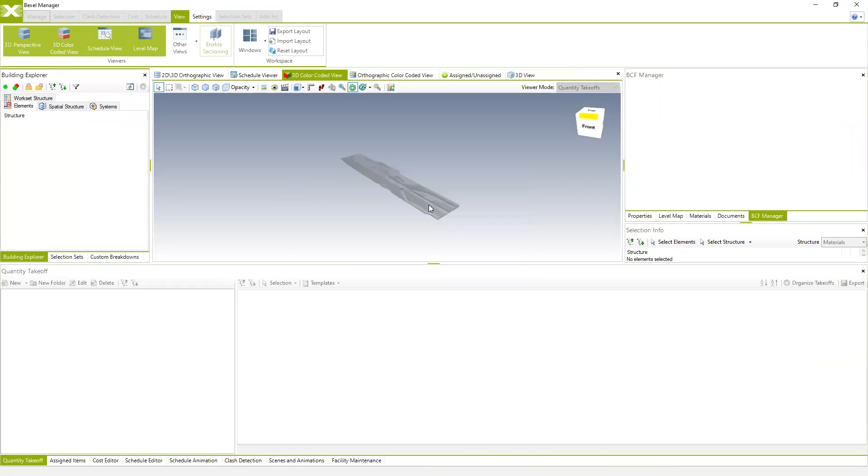And this one is an infrastructure project, which is created in ProVI. These are all elements exported in the IFC file. So let me just show it right here.

Go to our 3D view, and we can automatically use any type of available segregation, because I'm not really familiar with the German language, but I can create a new quantity takeoff. This one is actually a project from the IFC. We can go to the sources, you can see the source is an IFC file, and we can create a new quantity takeoff from the entire project.

And we can segregate these according to the buildings. Then I'm going to use the segregation according to these, let's say, elements, because I'm not really familiar with the project. And I'm going to calculate also, because I'm not really familiar with the project.

Let me just try to find areas or the volumes, largest projected area, because this property is available from the project. And also I'm going to try to find the volume. Well, probably it's differently called, the property. Let me just try to find something else.

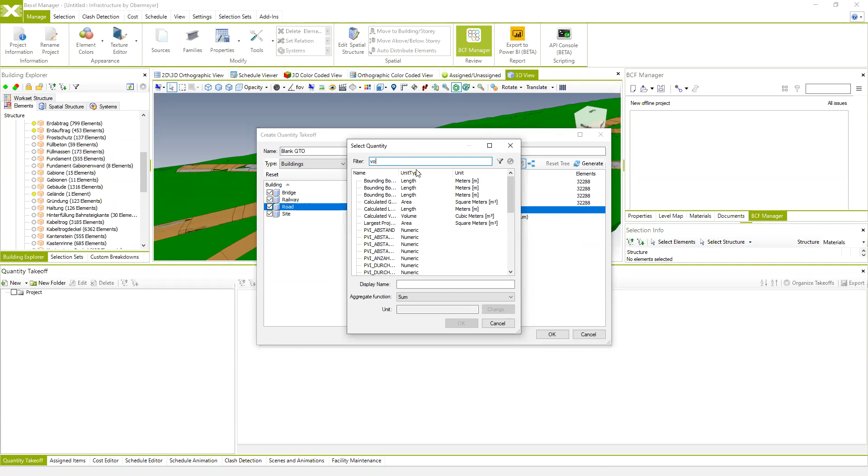Let's use this one and colorize the element by the family. So the system will automatically create a quantity takeoff, segregated according to the one we specified. I can go to the color coded view and see the building according to these colors from the quantity takeoffs.

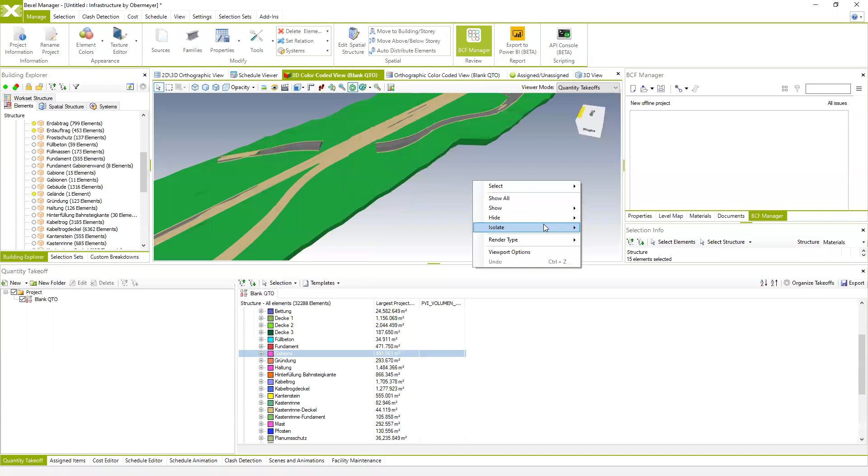And we can easily select these elements from the BIM model. I can try to, this is the one. This is quite a large project, so it's not easy to identify all the elements, but it doesn't matter which source or type of elements you're using—the quantification works anyway, because it uses segregation according to your needs, and uses the properties available in your project to calculate the quantities.

Can we take quantity of painting, joinery? Well, all the properties available can be used for quantification. If you have a specific property regarding the area of the paints or the joints, whatever you have, it can be used for quantification. Can the system detect different parts of the model which may not have been quantified,

like staircase bottom surface area, or similar? Well, this is something you have to be familiar with. You have to know the limitations of the authoring tool and which properties the authoring tool does not provide. The BEXEL Manager uses the properties and quantities coming from the authoring tool. So if your authoring tool does not provide the surface area of staircases from the bottom or similar things, that will not be calculated in BEXEL Manager either. We're using the available properties.